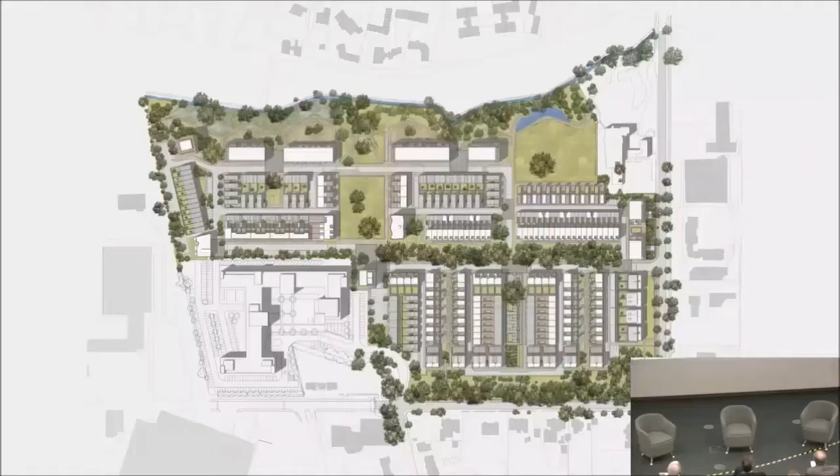So Accordia is out on the western side of Cambridge. It's an old government building site, and it sat in a mature landscape. In terms of the master plan, what we felt was really important is collaboration, not just with other architects, which we did, but also with the landscape architects. It was Andrew Grant's associates who worked with us to develop this master plan.

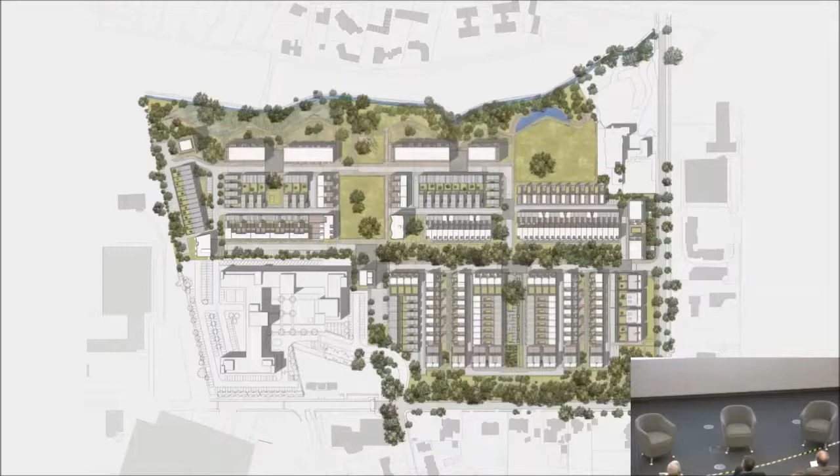And unusually for these sorts of drawings, they've got very big trees, but the trees are actually that big. What we were able to do was work with the existing grain to create a really coherent structure, which defined these very simple routes through the site. And I think hopefully you'll agree that within that there are these very large open spaces.

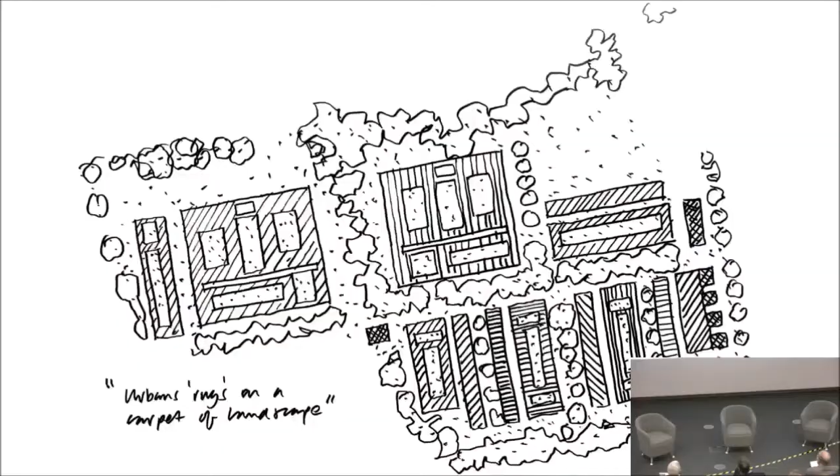It's kind of set the benchmark in terms of what's now referred to as the London vernacular, which is both good and bad for us, because in a way it's become perhaps overused. But what it does is establish a kind of normality, a kind of building structure which defines routes and creates places for people to live and prosper.

So the diagram we've got here, this is one of Keith Bradley's, the Bradley in Feilden Clegg Bradley. What we came up with was this idea of these rugs within a carpet of landscape. But the rugs themselves are actually much tighter, much denser than perhaps all the guidance would suggest that you have today.

But what that does is give greater value to the landscape between the buildings, the landscape that most people experience and share. And in order to achieve that, for each of the homes, what we wanted to do was create their own gardens, not tacked onto the edge of the building or the back of it, but within the 3-dimensional building form. So there was this idea of gardens on a number of levels.

So it's a very simple diagram here of the shared space we were talking about in between these rugs. There's living space at the ground floor, a sitting area, and a bedroom area, but all had their own garden spaces. Now, this is very generous as a proposition, and in some ways that's why I'm saying it's a bit of an exemplar.

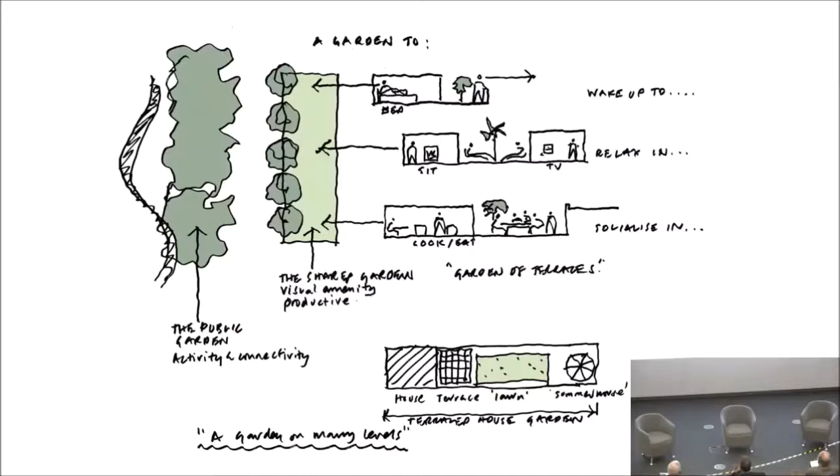But I think there are lots of threads that we can borrow from in terms of informing our new attitude towards what buildings can be and how close they can be together.

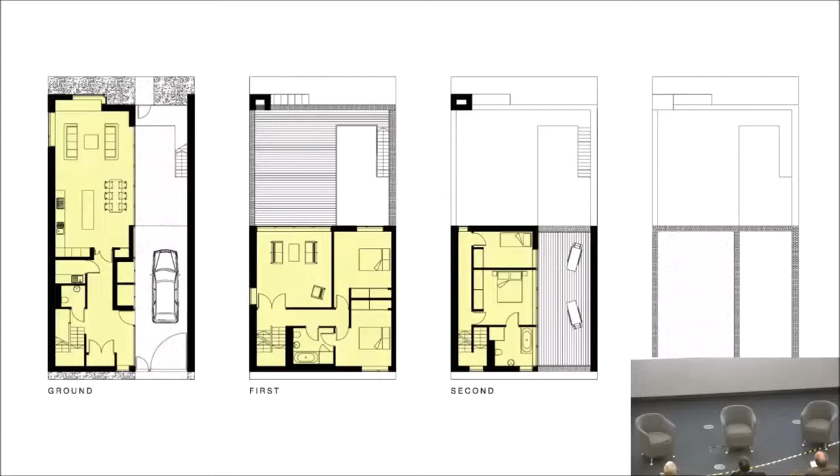So this is just a quick set of plans, bringing the cars into the plot and having perhaps a rather utilitarian experience at the ground floor with a living space. And as you move up towards the bedrooms, each of those opens out onto a generous terrace. And here are just some images which illustrate how that would look.

So what's it like to be in these spaces?

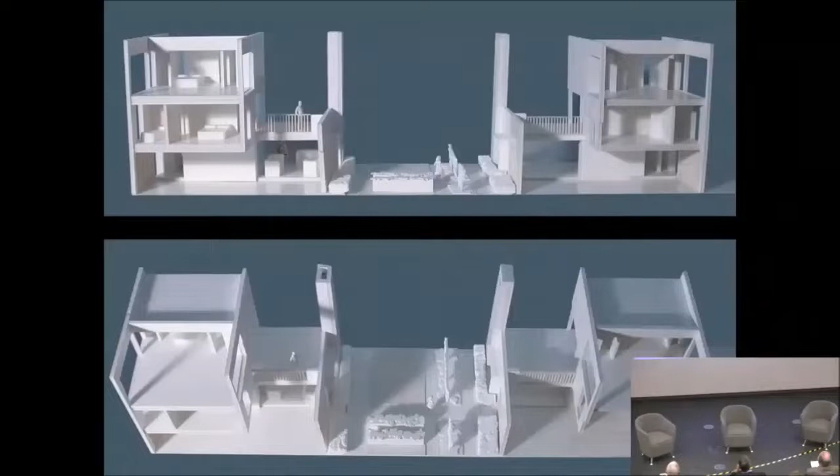I've got a couple of slides here to show that although the buildings are in close proximity, there's a sense of intimacy and light, especially as you move further up, and they become wonderful places to be with amazing views across the site. Here are some interesting shots showing the 3-dimensional nature of those spaces, all held within the confines of the plot. We have some nice models showing that while you have spaces at different levels, within the centre you've got a wonderful environment which is car-free.

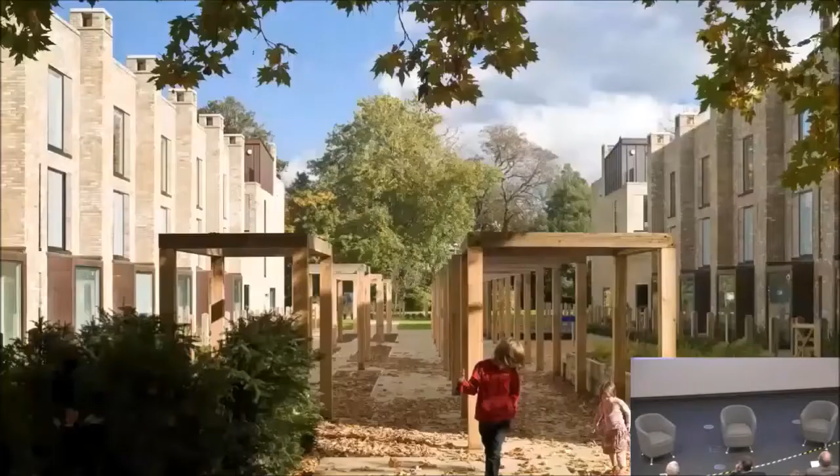To commune, I suppose. So there's just two slides - this is one we saw right at the beginning, the spaces between, places for people to contemplate, to meet other people, and more importantly, places which are safe where children can play. This is one of the buildings, looking at how important the landscape is and working with the existing trees - there's an amazing plane tree in the middle there which we retained.

Just another very short presentation looking at how simple buildings can be from the outside in terms of placemaking, but then looking at potentially moving away from the corridor scheme, the ubiquitous corridor scheme, which is a little bit too long and a little bit too dark.

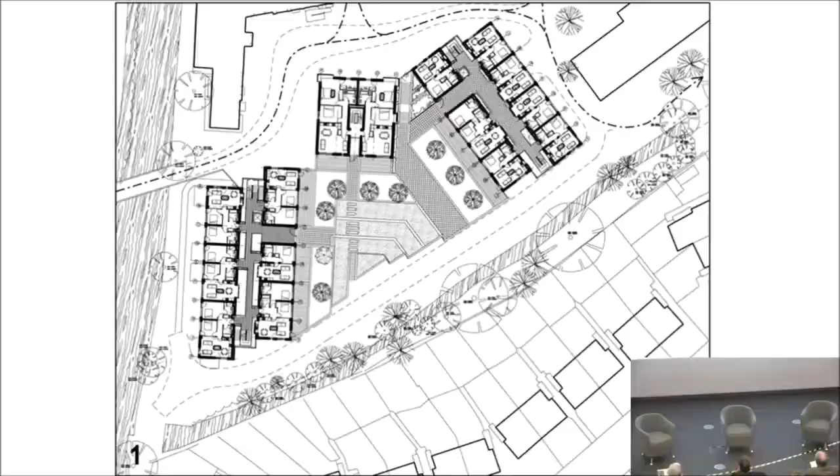So we have what would otherwise be a normal corridor scheme, but pulling them apart and letting light down. It works for about 4 stories, because after that you don't get the natural light.

On the left here we have these placemaking exteriors, and on the right hand side we have these interiors which are full of light, and you can have living spaces which look into that, which would otherwise just have a single aspect. So you can address issues of ventilation, but also create a sense of community within those buildings.

So we think it's quite a nice exemplar. As I was saying, the buildings themselves lend themselves to placemaking rather than being an object building. This is the exterior as it relates to the river, creating a really nice environment for people to wander past and enjoy the bank.

Right, so the next one, sustainability, which I'm going to do instead of Glenn today - we tossed a coin and I unfortunately ended up with that story. As I said, we've been around as a practice for 40 years, and Peter Clegg has been at the forefront of sustainable design for all of that period and before.

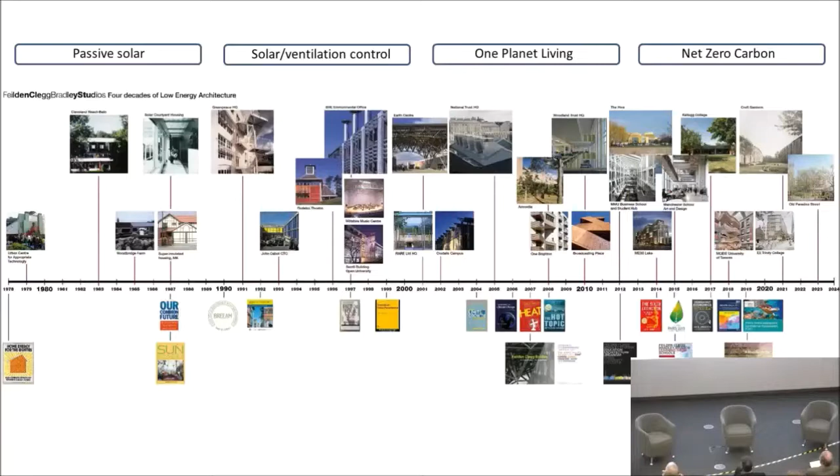So there's a story that runs through our understanding of passive solar energy, natural ventilation and solar, one planet living, which I'll come on to in a minute, and then net zero carbon. There's a lot to talk about - I'm not going into detail, but these are all becoming very familiar now. What we've chosen as a practice is to follow the one planet living principles, which I think is a really nice way of understanding the struggle we have in addressing the problems us humans have generated.

So what's one planet living? At the moment, many developed countries use resources more than one planet can sustain. In the UK, some of us use 3 planets worth, some use more, some less, but on average it's about 3. There are some countries which use 5 or 6, offset against developing countries which, fortunately for us at the moment, aren't using all of that up, but they will do, so we need to address that.

So the idea of one planet living is to identify how we use energy, where we source our materials from, and our lifestyles, to balance out how we can improve the planet and move towards a one planet living economy.

One Planet Living is set out in 10 points, starting at the top with health and happiness and ending at the bottom with zero carbon. It's not a metric, so there are no numbers attached. It's about prioritising, finding sites, and saying what we should focus on and how we can best address the particular issues which affect the way we use the planet.

Some of these points are much more complicated to address than others, but it's actually a really good consultation tool, and a good way of testing how your building works and communicating that with clients and communities. We were fortunate to work with a client, Bioregional Quintain, who did a joint venture with Crest Nicholson to develop a site right next to the station in Brighton. It's 172 homes, actually quite simple in some ways, but the story behind it is quite complicated, trying to address all of those 10 points.

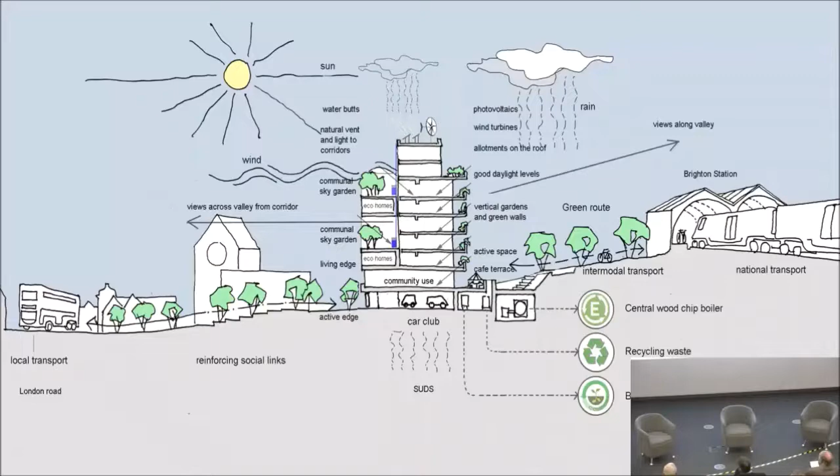This was quite early on, and I think it's still very relevant to where we are today. The plan itself is very simple - New England Street, a very simple terrace of buildings, with a route up through the middle to the station and to the green routes running out of Brighton.

This is a series of diagrams looking at one aspect of what we were trying to do in terms of overheating, which is an issue in new buildings, but also sunlight and daylight, and creating delight not just outside the building and within the landscape, but also within the buildings, generating communities.

The diagram at the top shows the kind of ubiquitous corridor running from one end to the other. What we did was break that up. It's actually quite a large number of units, which we wouldn't get away with today, but in breaking it up we provide views out and ventilation into the corridor.

What we also did, because the QS wanted us to, is put some more units back. In doing that, we were able to provide decks at every single landing, reinforcing a sense of community - not just at the community use space at the bottom, but throughout the building and also on the roof itself. Coming to the other uses, it's quite a nice proper mixed-use development, with community and commercial uses, including the Ethical Property Company who ran the office spaces at an affordable rent.

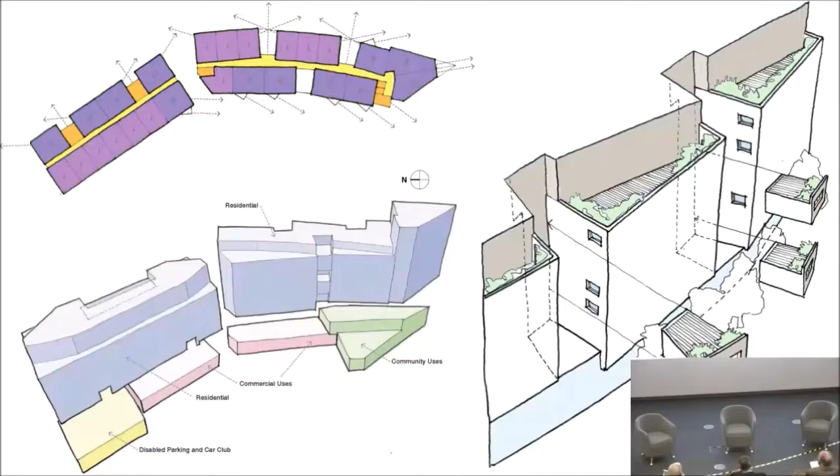And so in a sense, it was a kind of a living, working community. And then just a series of slides looking at how that works. One of the issues we also have, coming back to the land issue, is density. So this is actually quite a dense building, but in terms of its orientation, sunlight and daylight, this has been very successful.

This is just a shot of one of these corridors. Looking down, the corridor opens up and closes down, and then it opens out onto these spaces at every level. And the green caretaker would then curate how these spaces could be used.

It was also one of the first buildings to have allotments on the roof. We're using the Bokashi composter, and for those who listen to Gardener's Question Time, Bob Flowerdew did a few programs up there, but we were never allowed to take any photographs of ourselves with him. I found one - I didn't know who he was either.

Anyway, so this is just one of the last slides looking at how that sort of green corridor runs through adjacent to the railway.

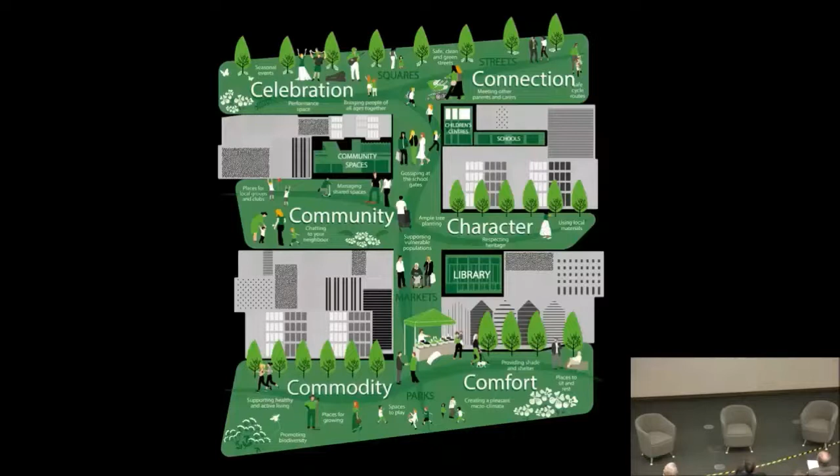Right, so those two aspects about how we use land and sustainability obviously come together in probably one of the most important themes that we'll both be focusing on, which is placemaking. As with the story about carbon, just before we went into lockdown, we had an exhibition in our office called Carbon Counts, and it became kind of the kickstarter for Architects Declare in terms of the climate emergency. And we had that exhibition, but also other exhibitions which are, in a sense, looking at and articulating what issues around sustainability are, but also other broader issues.

What is, how do we make places? What makes a good place? What are the good buildings and good homes that form those spaces? So this is part of it - just one slide from an exhibition about all of the elements that come together to successfully define places.

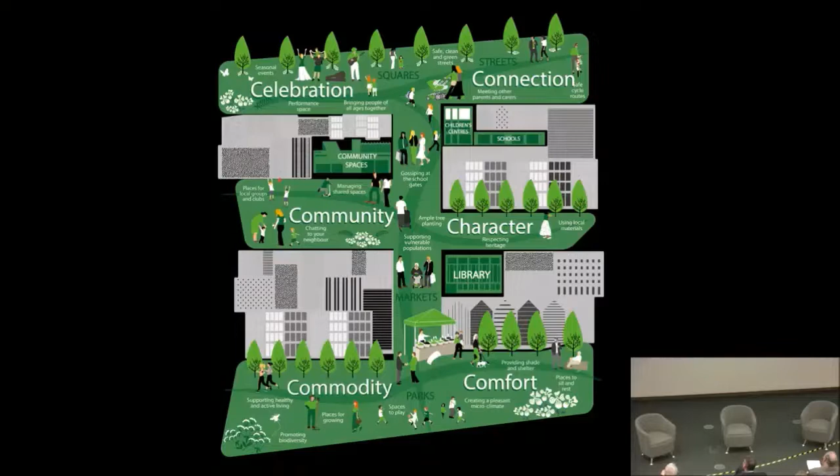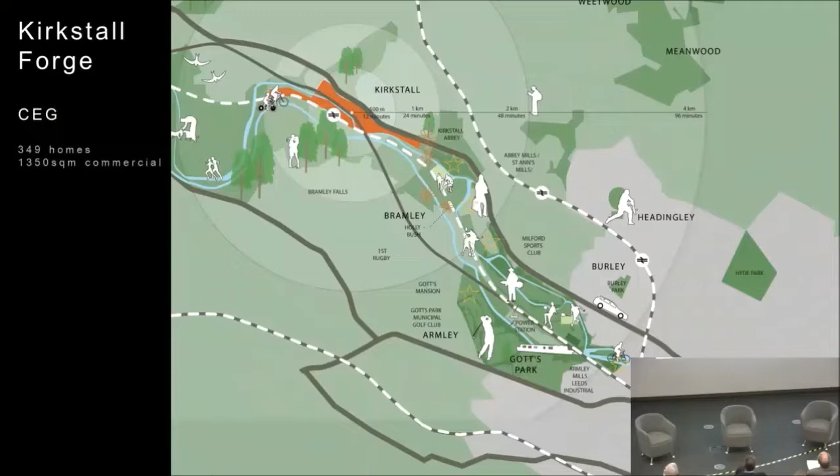So the building, the site and development in terms of the brief for this evening's talk of multi-home developments is Kirkstall Forge, which is just north of Leeds. A development by CEG, about 350 homes. It's actually really quite an amazing opportunity that we were able to latch into, and our responsibility was to turn it from just a ribbon development into a really good sense of community and place.

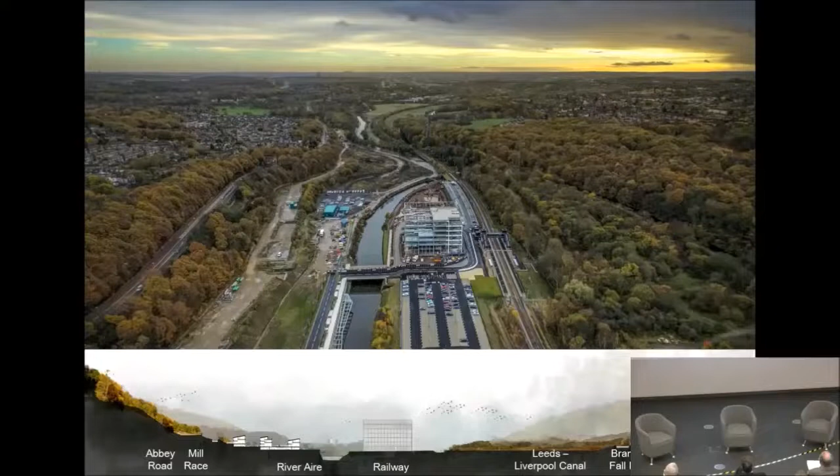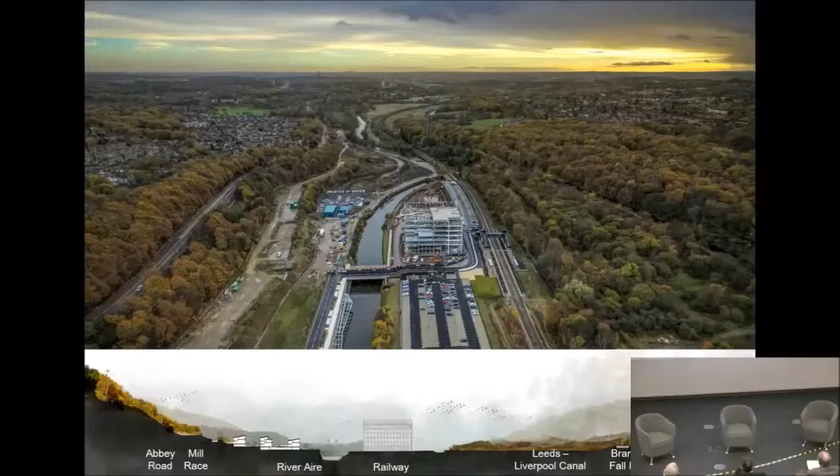So this is the landscape as it was just before they got going, and you can see there's an existing railway line that runs through the site. And they then established a railway station there, and all of a sudden that kind of unlocked the whole story in terms of how people could use this existing environment to create and claim it as a place to live.

So just looking further afield, there's an amazing landscape, amazing river, places to visit from the historic and industrial heritage of that area. And it's something that we felt strongly - not just focusing internally, but actually looking beyond the site was an opportunity to define this as a really interesting destination and place for someone to live.

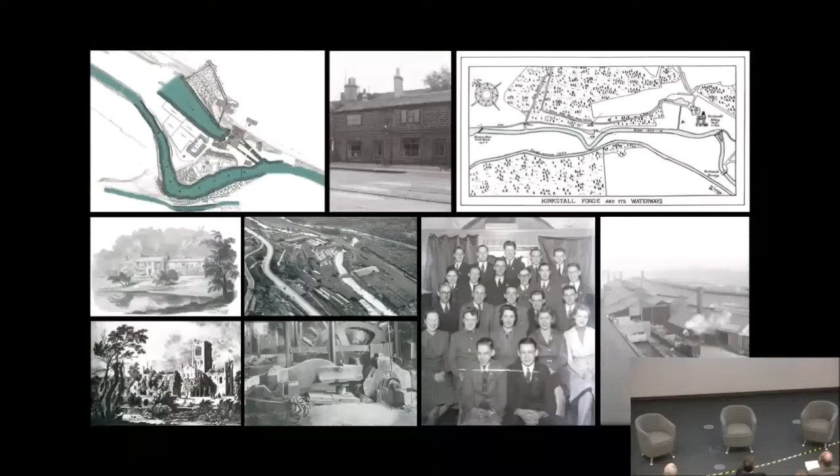So I think one of the key things with developments is we often look back at the history of the site, the existing forges that were there, and what was the legacy of this space, and what were the opportunities. It's an incredibly hard environment, but a place where people came together and worked and lived. And lots of those people still have a resonance in terms of their understanding of that sense of place. I think that's quite important - whilst we might imagine that wholesale redevelopment is appropriate, there's always the memory of how people operated in these areas.

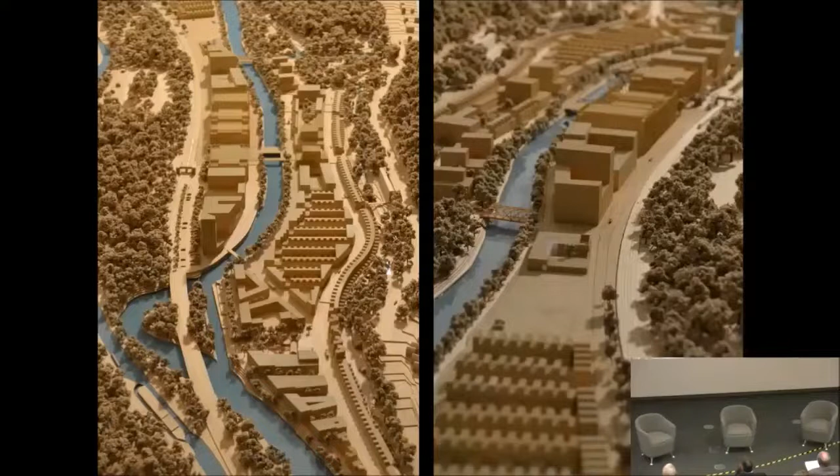It's just a couple of model shots looking at what the opportunities were on the site. We've got the railway, obviously, which opens up to its broader context. We have the larger, higher density buildings, which actually makes this a viable proposition, but also the uses, which I'll come on to in a minute.

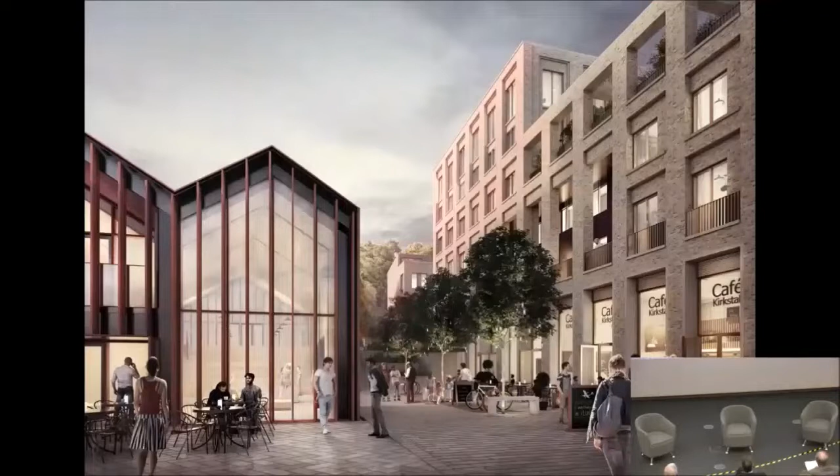And then as we move down towards the river, the scale drops and the placemaking begins. Key to all of these developments is creating a coherence, a sense of order, of scale, and within that there's this placemaking which is the ordering principle around which the homes are developed.

This was what was referred to as the stitch, where people would link through to the existing neighbourhoods, where cafes and other use classes were placed, but people also lived as well. So it became potentially an extended experience, not necessarily a 24-hour experience, but throughout the day there were places to visit.

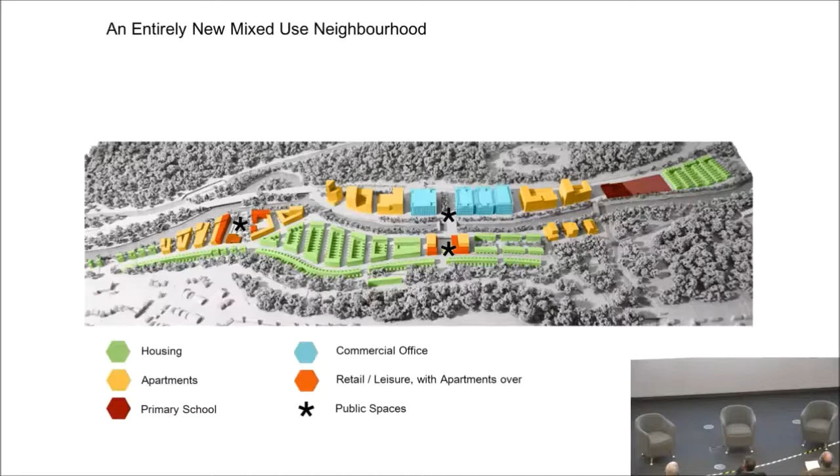In terms of the site itself, how it was broken down, and looking at the ingredients of that development - we've got housing, but that goes hand in hand with apartments and affordability. We've got a primary school, the commercial, retail, leisure, and the spaces around which we order those uses.

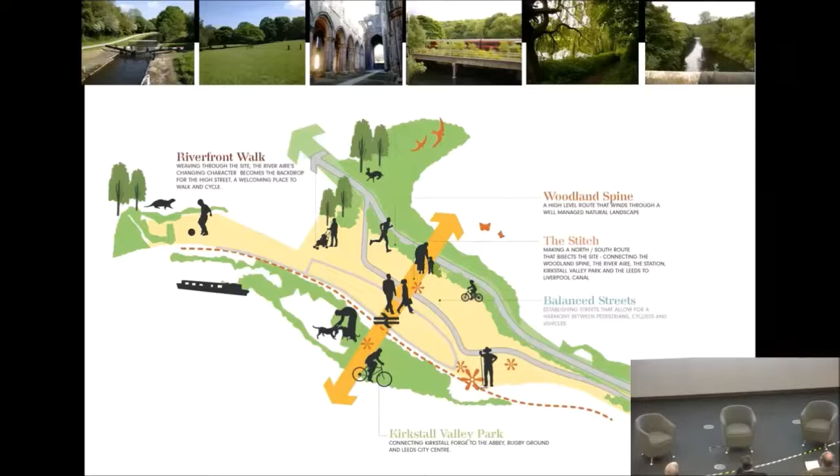There's a series of diagrams that look at taking this warp and weft of the site, the journey along the river and along the railway, and where the buildings are located. There's a very strong axis that runs through, tying together the landscape on either side, so there's a need to define a sense of place - not just one, but a series of places, major and minor notes.

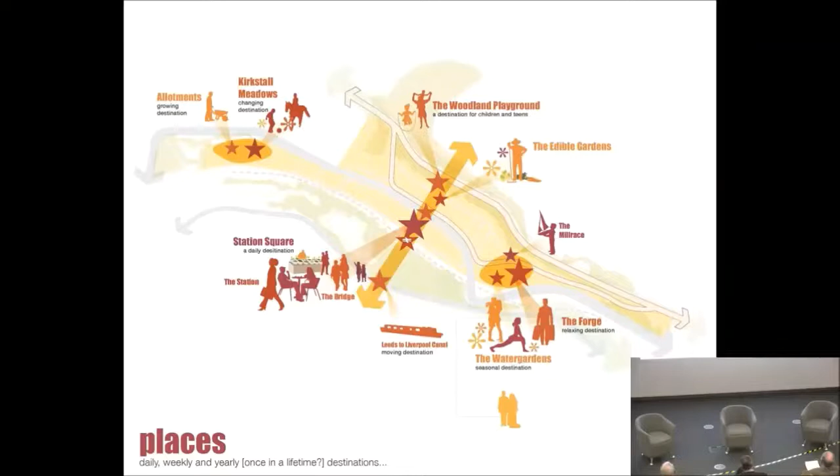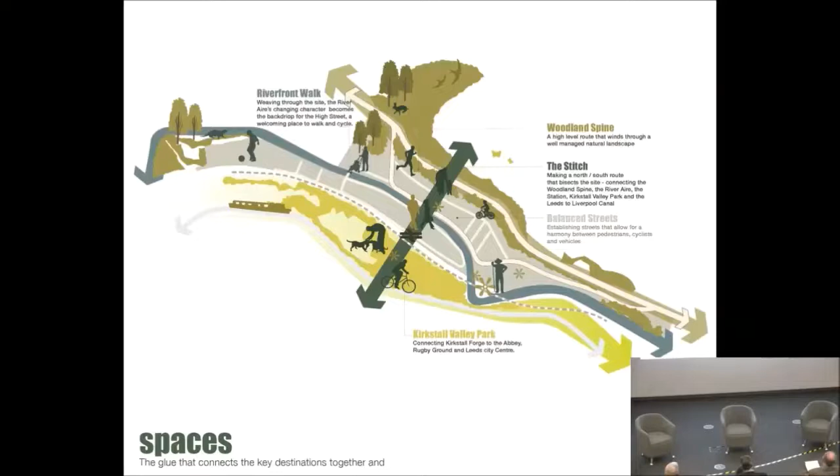So we've got places, but also the spaces, and the spaces can work with or against that or along that. We have this wonderful valley park and the woodland on the other side of the river.

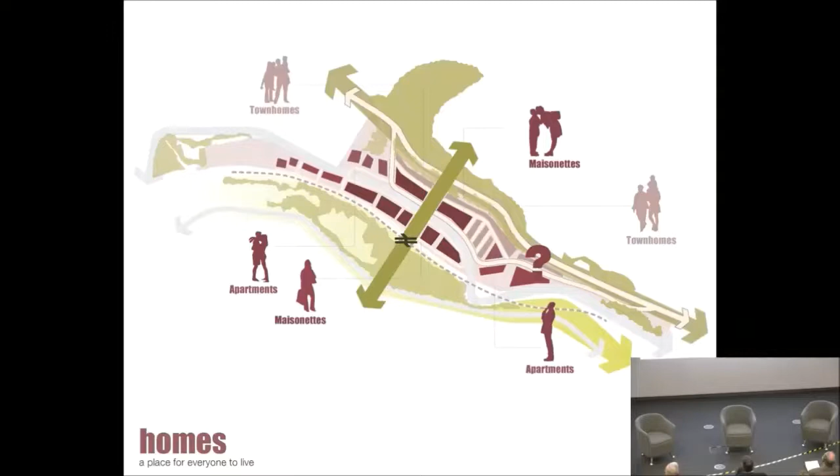And then finally, having defined a set of parameters, the homes and houses can be placed, and the diversity of those types. So we have not only different types of houses, but different tenures as well, which is key to creating a sustainable community.

We were lucky enough to have Kirkstall Forge railway station located here, along with the first of the office buildings. And coming back to the idea that rather than reinforcing the opportunity for driving around, having bikes is something which is becoming more and more mainstream.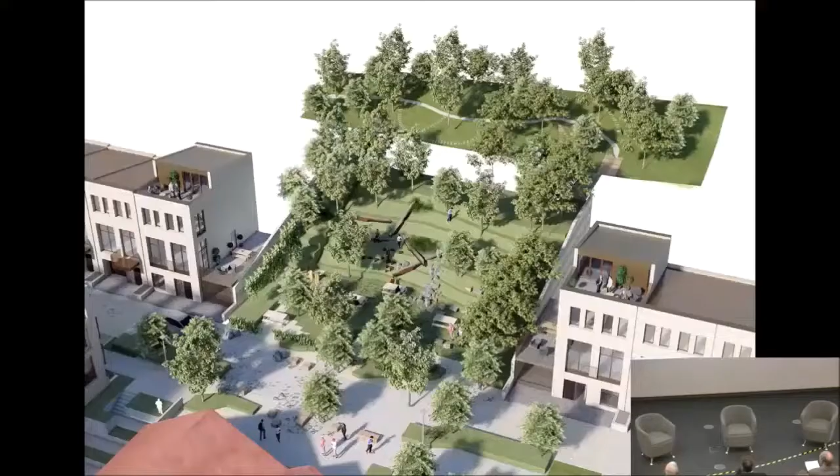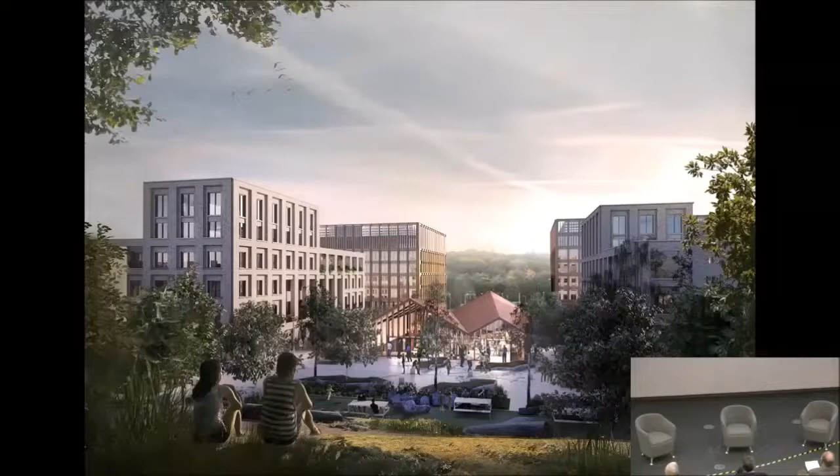And then the places that sustain it - the spaces between the buildings, which are in many respects more important than the buildings themselves. There's places to play, places to visit, and places to live.

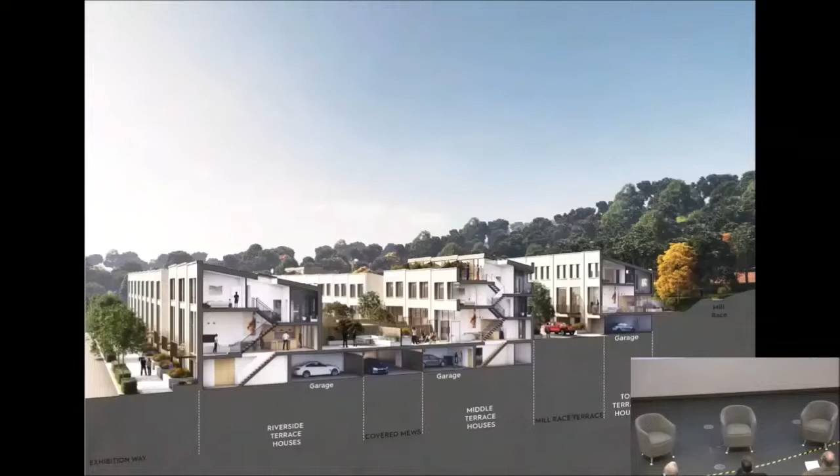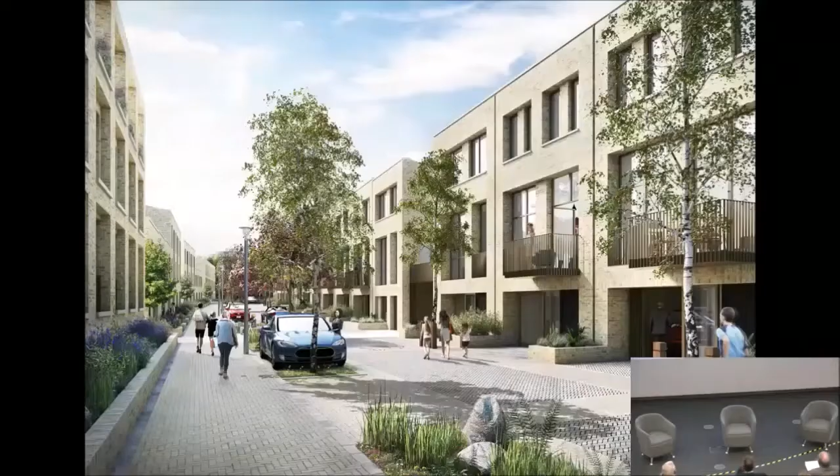This is just a final few slides looking at the housing typologies, which make reference to some of the ideas in previous schemes, where we have a covered mews through the centre. This locates the parking, making this a non-car dominated development, but it also allows us that intensity in terms of the location of buildings one to another, and the streets developed around that.

I think these are much more natural, rather than a series of wide boulevards where we can have our cars end on end. We've got a few disabled spots, but we're making these delightful routes that run through, connecting one space and one place to another.

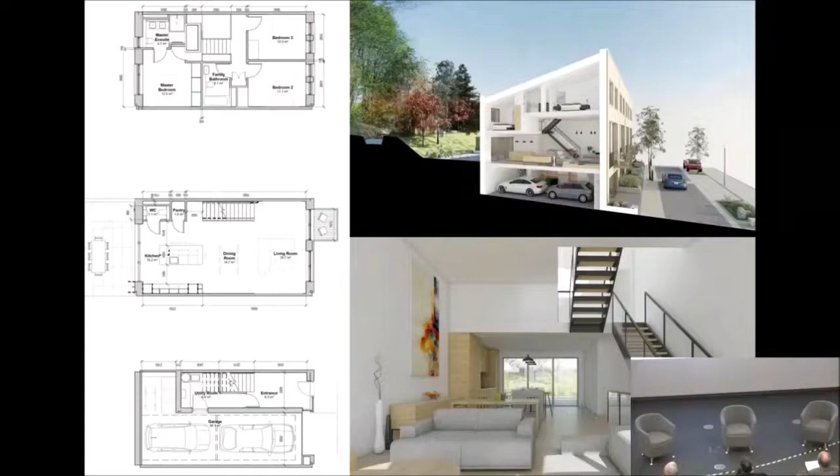Again, the diagram is similar to Accordia, where we bring the cars off the streets, and then use the topography to have a greater and more immediate relationship to the landscape around it. And then the final slide, which looks at how that river development might manifest itself.

In summary, I think all of those ingredients we were talking about in terms of placemaking have found themselves here - this is only a couple of years out beyond the point where it gained planning. But already a lot of the story about sustainability is overtaking us, so where it says there's no MVHR, there will be. All of those things are going to be pulled into this site to make it not just a socially sustainable environment, looking at the social value we offer, but also in terms of the environmental context. So I've finished there - I'm going to hand over to Glenn now.